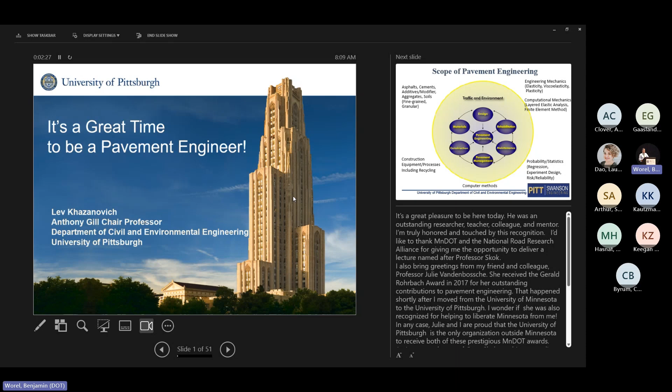In my pavement class, I like to start my course with a slide that I adapted from the great Carl Monismith. It shows that pavement engineers deal with a wide range of very complicated and important problems. And solving them requires a deep knowledge of material science, engineering mechanics, computational mechanics, mathematics, computer methods, mechanical engineering, and many other areas.

And that makes pavement engineering a truly interdisciplinary field. But many people, especially in academia, think that pavements are a low-tech field. And I can't blame them, because 35 years ago, I was one of them.

Again, I was trained as a structural engineer in the former Soviet Union. And when I applied for a PhD study at the University of Illinois, I wrote in my application that I would like to do research in concrete structures. But I was accepted into a concrete pavement engineering program.

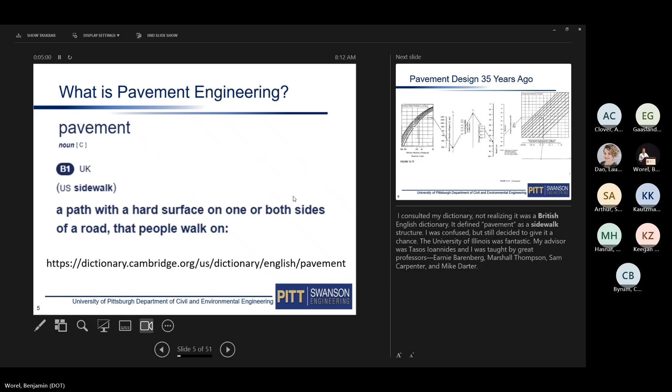Many of my classmates like Jeff Roesler, Tom Van Dam, Navneet Garg are industry leaders today. But the subject felt quite strange.

In the first year, I was taught that to design a pavement using the empirical AASHTO design method, what you really needed was a straight edge and a sharp pencil. In '93, this procedure was significantly improved by adding a straight line.

There was a Westergaard model, but it treated a concrete pavement as a plate on a Winkler foundation. So a simple structure, at least how I thought at that time. We were told that a critical loading on a pavement is a wheel edge loading that generates high tensile stresses at the bottom of the concrete slab. And there was a simple analytical solution for this.

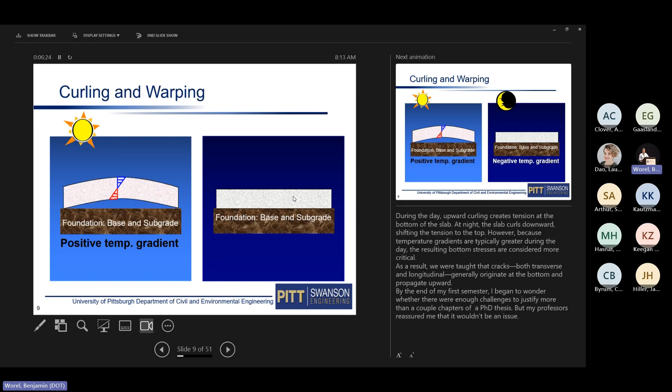But we were told that daytime gradients in temperature are higher than nighttime gradients in temperature, so tensile stresses at the bottom are still higher than the top. So cracking would only initiate from the bottom and propagate up.

When I was asked at the end of the first semester if I still would like to continue a PhD study in this field, I was wondering if there would be enough problems for the entire PhD thesis to analyze this simple structure. My professors assured me it wouldn't be a problem. And 35 years later, I can see that they were correct.

A bulk of my research dealt with development of finite element tools for analysis of concrete pavements. I was improving a computer program, ILLI-SLAB, developed by Professor Barenberg and his student Amir Tabatabai in the late 1970s. This program was later improved by many graduate students at the University of Illinois, and I made my modest contribution to it. By the end of the 1990s, it became quite powerful, although a very difficult tool to use.

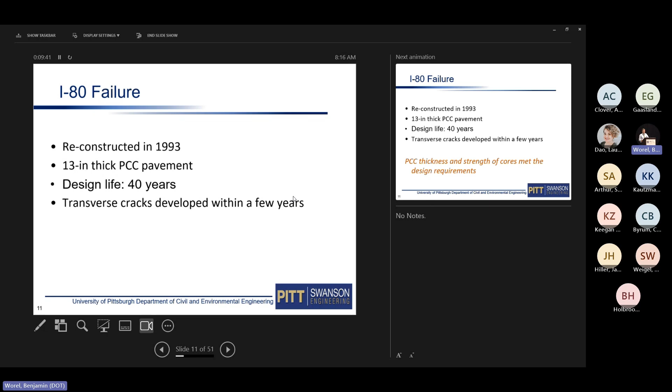Numerous studies demonstrated there was no thickness or strength deficiency in that pavement, but the number of cracks kept increasing. What was really strange was that cores clearly indicated that cracking initiates from the top and propagates to the bottom. That was strange because, according to Westergaard theory, it could not happen - transverse and longitudinal cracking were supposed to initiate from the bottom and propagate to the top.

We just finished developing iSlab when ARA was asked to investigate this problem. We collected all the information we could about this pavement - its thickness, strength, material properties, temperature gradients - and performed comprehensive iSlab 2000 modeling. We conducted hundreds and hundreds of simulations. Now we could do it, and now we could easily visualize the results. But in spite of some minor improvements, the results clearly confirmed the Westergaard theory - stresses at the bottom were always greater than stresses at the top.

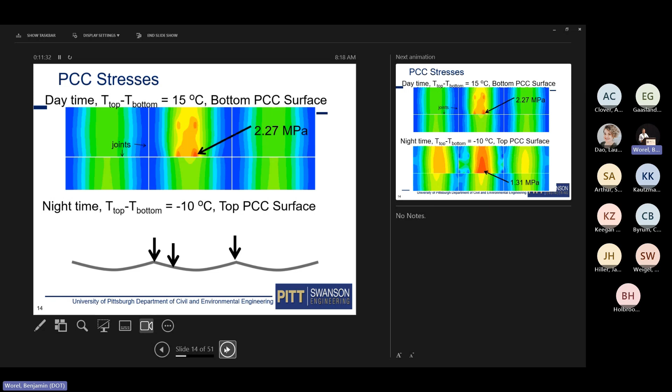So we improved our model. Instead of modeling just one axle, we modeled placement of an entire truck on the pavement for nighttime conditions. It didn't make a significant difference. It made the results a little bit closer, but still the bottom stresses were higher than the top stresses.

At that time, Dr. Darter came from Chile, where he took this photo, now iconic. You can see a shadow for this string, but the photo was taken during daytime - otherwise you wouldn't be able to see it. At daytime, the slab is supposed to curl up, but it behaved as if it were nighttime.

So we looked in the literature and found some research at the Technical University Munich, where this phenomenon was explained by two processes: an irreversible shrinkage and a temperature gradient during solidification of concrete immediately after placement.

So we performed a kind of quick assessment of this phenomenon and introduced built-in curl temperature gradients - a temperature gradient that is required to make the slab flat. When we accounted for this in the analysis, we were able to predict that stress at the top surface can be higher than the stress at the bottom surface, and cracks can propagate from top down.

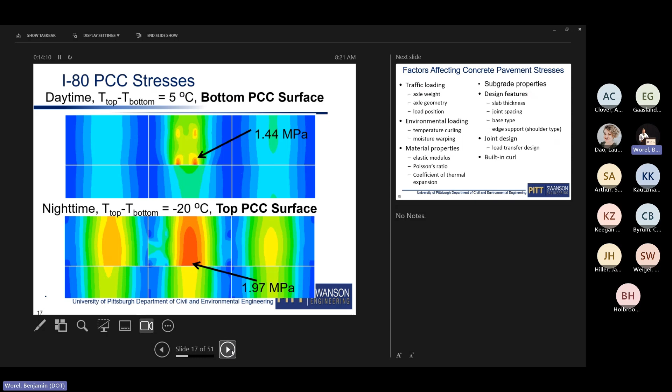But that made the problem of predicting critical stresses for the mechanistic empirical design even more complicated, because stresses in concrete pavements depend on many factors: traffic loading, axle geometry, axle weight, load position, how far it's placed from the edge, temperature gradients, now moisture gradient, material properties that change with time, subgrade properties that change seasonally, slab thickness, joint spacing, base type, presence of shoulder, and many other parameters.

So what we did was look into machine learning - how to develop a model that will predict the stresses almost instantaneously, but be accurate at the same time.

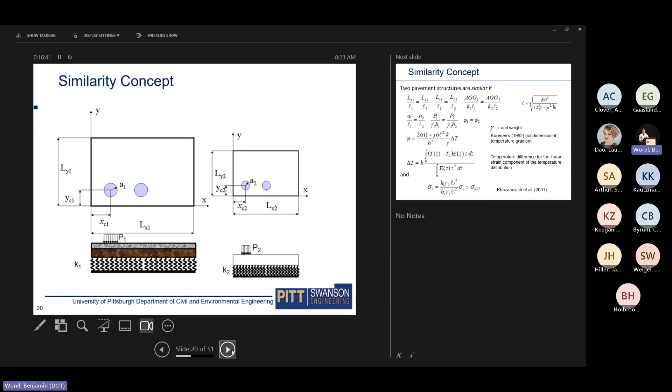We developed a mathematically rigorous condition for the similarity. I will not go over these equations. I just would like to point out one parameter, a non-dimensional temperature gradient that combines seven independent parameters into one factor. I found this parameter in a Russian book where it was given without any explanation as a self-evident quantity.

But we checked it, and it really works, and it allowed us to develop neural networks that matched iSlab 2000 very closely. And that allowed us to develop a very efficient procedure for design of concrete pavements.

Some of you may remember at that time it was called the 2002 Design Guide. It was introduced. A single asphalt design took like more than an hour, and concrete design took a little bit more than a minute, most of which was consumed by

climate simulation. So I'm very proud of the work we performed 25 years ago. That means it can be improved, and I'll show you some improvements today. But it was, in my opinion, a remarkable achievement at that time. Mike Darter, who led that effort, made an enormous contribution to the field.

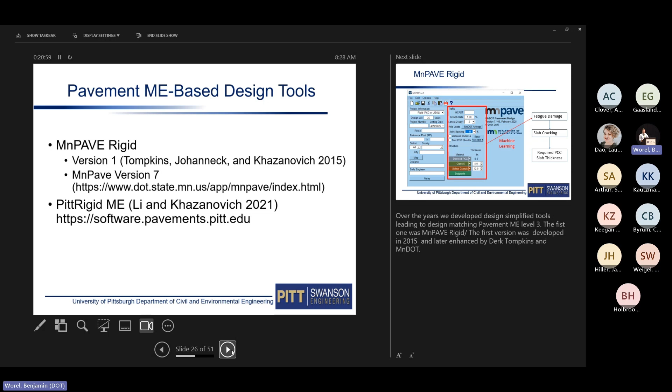And later, when we moved to Pittsburgh, we developed a similar tool for Pennsylvania conditions. So you can see MnPave. Basically, what we did was take these inputs identified by MnDOT.

We ran a very extensive simulation of AASHTO 1.1 software, collected fatigue damage, and using analytical extension, computed slab cracking, and from that we were able to determine the required slab thickness.

For PennDOT, we used the same approach, but now we used Pavement ME version 2, and we included a few more factors. The program not only computes the required slab thickness to combat cracking, but also determines the required dowel diameter to prevent excessive joint faulting. In addition, it also predicts the development of cracking and faulting over time explicitly.

These are simplifications of the design guide, but that doesn't mean the design guide doesn't have limitations, and one of them was identified a long time ago: the way the mechanistic-empirical guide models the interaction between the concrete slab and the base, especially if the base is stabilized. For an aggregate base, it's not an issue, but for a lean concrete base in particular, the loss of bond is the most important parameter that controls predicted cracking.

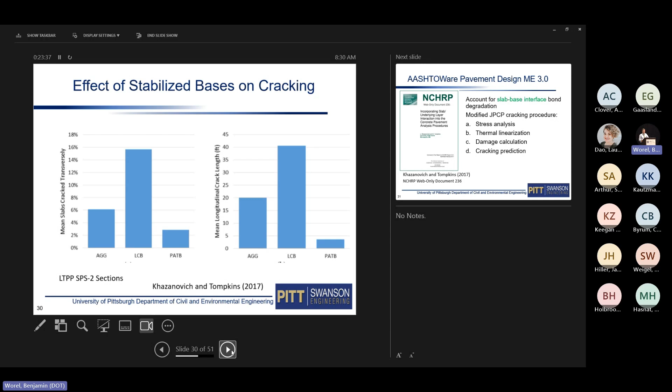So we were lucky to win NCHRP project 1-51, and Derek Tompkins and I developed a new tool. We looked at the interaction between the base and the concrete slab, and we introduced a partial bond and an ability to vary this bond over time and deterioration of this bond.

But it did not help to improve predictions significantly. So we looked at the entire procedure and we modified the stress analysis. We looked at the temperature linearization. We modified damage calculation, modified cracking prediction. So basically, it's easier to say what was not changed than what was changed. It's a really new procedure.

After the project was completed, I performed a detailed fracture mechanics simulation of the concrete slab, and we found that the new model is actually much closer to reality than the old one.

But I would like to point out another parameter that was changed: built-in curl. When we introduced it in the end of 1990s in the United States, the first reaction was no, that's not correct. But in two years, it was accepted as ground truth. And if you go back to understanding the causes of built-in curl...

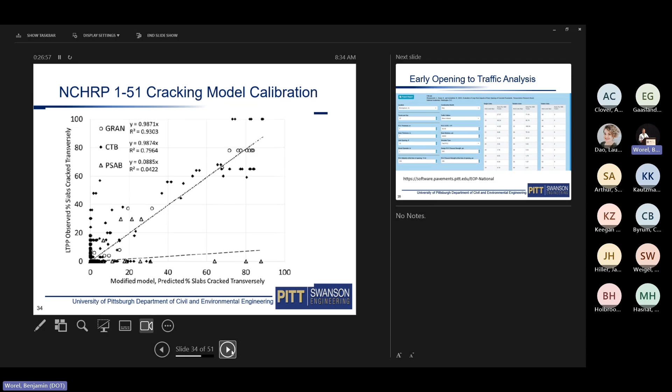But there were several other projects where we had to develop different machine learning techniques. We developed a tool for early opening of concrete pavements to traffic, based on a project sponsored by NRRA, and Bernard Izevbekhai was the project manager for that study.

And again, in that project, we simulate stresses in concrete and deflections in concrete pavements immediately after concrete placement and opening to traffic. This is different from Pavement ME, which assumes that concrete is at least a month old.

We developed a new procedure for unbonded overlay design as a result of a pooled fund study, where Tom Burnham was project manager and Julie Vandenbossche was co-principal investigator. And again, that requires different machine learning because the structure is quite different, so we use a different slab model to simulate.

So basically, over 25 years, we developed a variety of models, and we used machine learning quite extensively for solving very complicated engineering problems, making it transparent to the user. So basically, the user can concentrate on engineering problems and not on performing calculations.

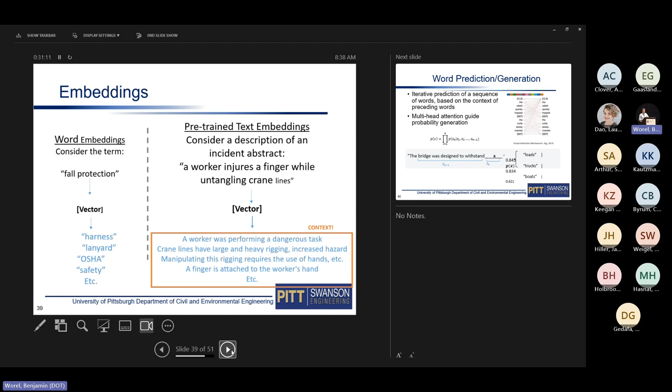So pre-trained models take words or sentences and convert them into vectors, and it preserves not only the meaning but the context of the word. For example, if you have 'fall protection,' if properly converted, the model understands that it's similar to safety, harness, and so on. Similar with sentences - if you're talking about an injured worker, it understands similar content to this.

Large language models are a totally different mechanism. They're based on probabilistic predictions of the next word using the mechanism of self-attention, and so basically they can predict the next word based on the previous words.

We've just started doing research in this area about 2 years ago, but in my opinion it's already got some exciting results. For example, we used it to identify major causes of construction accidents. The Department of Labor collects data on all accidents that resulted in hospitalization. We extracted accidents related to highway construction, vectorized them, and classified them. It allows us to develop a little bit better understanding of the major groups - a classification that better matches the narrative described in the database than classification performed manually, and it allows us to develop hierarchical exploration.

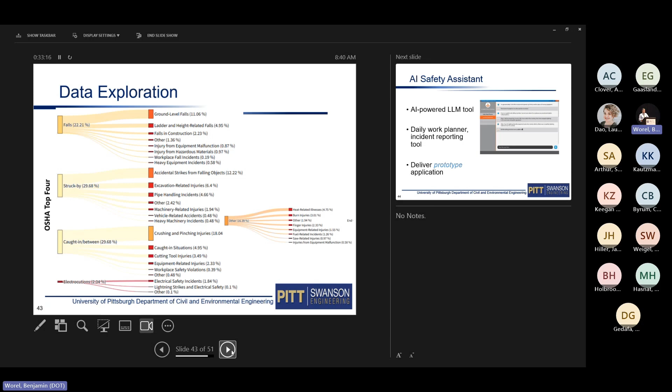It was our first application of this technology, and now we're working on an AI safety assistant - a tool that will help safety officers come up with daily instructions to construction crews based on specific operations the crew is supposed to perform. We're taking best practice manuals from MnDOT and the Department of Labor, and we also take into account past accidents from the Department of Labor database. We'll be able to provide specific recommendations, done in an interactive manner. The assistant is supposed to ask the safety officer exactly what operations are supposed to be performed, what materials and instruments they're going to use, and come up with the best recommendation.

In the unfortunate event of an accident, the tool is supposed to help the safety officer develop a report that is consistent with Department of Labor requirements, but by asking follow-up questions about what actually happened, to collect in a simple way all the information required for the accident report, and avoid the need to manually select the numerous categories currently required.

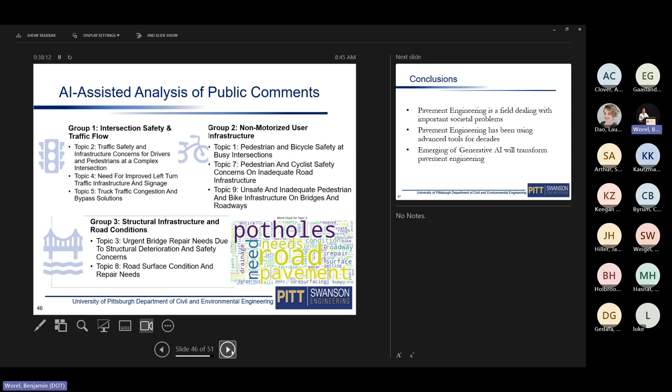But it's a huge task, and it's exciting, because if computers can play chess better than humans, they should be able to assist pavement engineers to do their work really well. It sounded like science fiction a couple of years ago, but it might be a reality pretty soon. It is an exciting time to be a pavement engineer.

It will change. AI will change our field pretty soon, but the entire world will be changed. So we should embrace it.

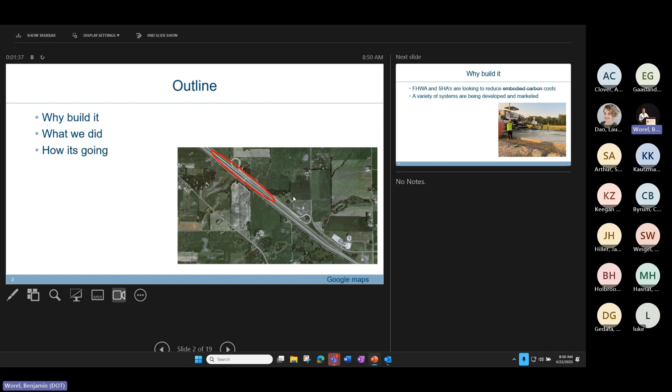Why build it? Well, federal highway, state agencies, and indeed the cement industry or the cementitious materials industry is working hard to reduce costs. Although the cement industry would still tell me, we don't care what the feds are doing, we're going to be at carbon neutral at 2050, so talk about it at will. So my presentation today is not funded by feds, I can talk about carbon.

But the impetus when we were doing this work was very much to reduce carbon impact from cementitious materials in our pavement construction. As Lev said, this is a real exciting time to be a pavement engineer, because not only are the design procedures changing and getting better, but the materials are changing. And some of you would say not getting better. But yeah, we have a whole swath of different materials available to us, which means we have to work hard at understanding them, how they perform, and how to work with them, which is a fairly large part of this conversation. There are a number of innovative people out there developing interesting and new combinations of current materials and new materials. As conservative engineers and control freaks, and most especially DOT-based, very conservative control freaks, we're very reluctant for change.

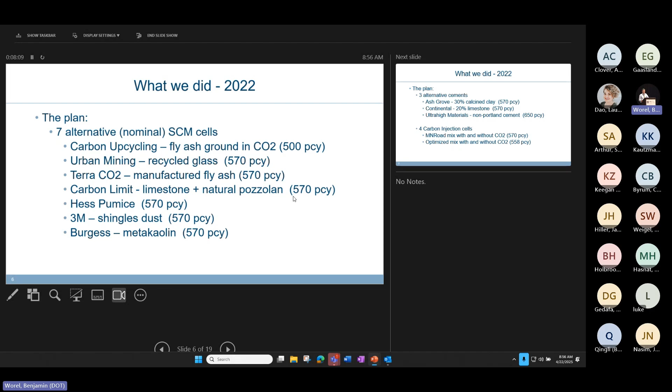There were 3 alternative cements: an Ash Grove calcined clay with 30% clay. There was a 20% limestone, and that was a request from us, because the thought was, if we're getting 15%—hey, we're engineers, 15% is good, 20% is better, right? And Continental agreed to provide us with that material. Then Ultra High was a non-Portland cement proprietary product. And then there were 4 other cells, which I was involved in, with carbon injection.

The theory being is that if you inject frozen CO2 into the ready mix truck at the time of batching, that CO2 would mineralize and help with the hardened properties of the mixture. The catch being, and their claim was that you could cut the cement content back because you were getting better performance out of the mixtures.

And so we had a standard Minnesota DOT mixture with and without carbon, and then the optimized mixture with and without carbon. The one thing that did happen in this case is that the suppliers were a little bit nervous. They were told, have at it, if it fails it doesn't matter too much, do your best. But they were kind of nervous, worried about the high visibility of this, and they didn't optimize as much as they possibly could.

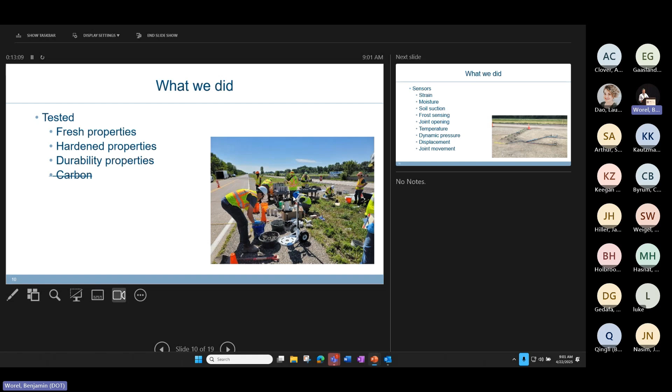We were trying to measure everything that we could possibly measure, and then every year going back and having a look at what are we seeing. How is it standing up? Is it spalling? Is it cracking? Is it raveling? Is there any other distress? We were up there a month ago, did a quick look at some of the sections, or all of the sections, to see how they're doing. And we will be reporting those in detail a little later.

So a couple of the key things that we learned - many of the suppliers delivered the product in super sacks, and what we discovered is that many of these products don't get out of super sacks too well.

Larry and a couple of the DOT staff spent a couple of late nights with vibrators and hammers trying to get the super sacks drained into a cement truck, which was then used to blow the material into the hoppers for the batch plant to be able to put it in place. I think there was a lot of interesting language late at night trying to get these materials out of the sacks.

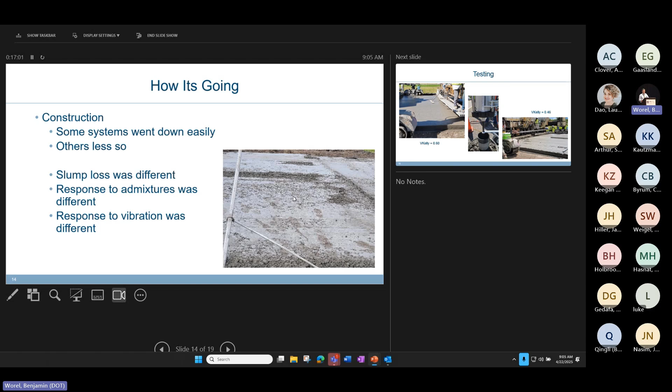I know Lev's group with Julie is working on this. I've got a research project going on it. Tyler Ley is working on it, and we're all happily competing with each other.

One of the tests we ran was the V-Kelly, which is built off an old California test, where you put a hemisphere on top of the concrete, a 6-inch hemisphere, run a vibrator, and measure how quickly that thing sinks. We found a really good correlation between what that device was telling us at the speed trap and what was coming out the back of the paver. It was even better than the good eyes, because a lot of us standing in front of the paver, watching the material come out of the truck, would just go, that looks good or not.

I was fooled at least twice, and in both occasions the V-Kelly test did pick it up. So I think this one does have some potential to be useful, particularly in the lab and potentially in the field going forward for feedback to the batch plant.

Another innovative test we were running out there was the Phoenix—this is Tyler Ley's test. It's basically a muffle furnace. You take half a cylinder, throw it into a tray, cook it at high temperature for 15 minutes, and measure the moisture loss, then back-calculate the water content of the mixture, which is critical because that defines the performance of the concrete in almost every respect. The data were internally consistent, so yeah, it's looking pretty promising.

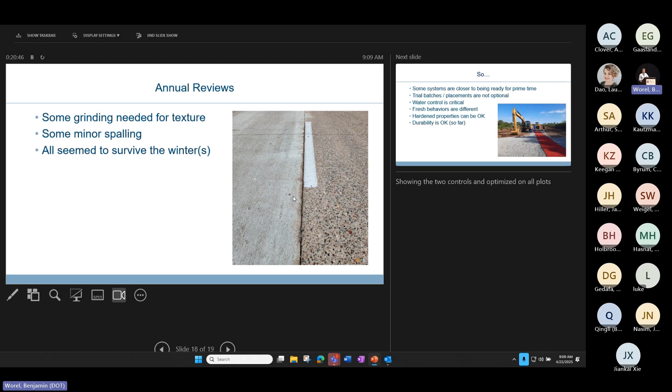All of them seem to have survived at least 3 winters so far. So in general, how's it going? Pretty good. To me, the hard part has been the delivery and the construction part. The survivability seems to be okay so far, though some systems are a little closer to being ready for prime time than others.

Trial batches and trial placements are critical. There was one difference between the '24 and the 2022 work: it was insisted that the day before, they had to make a truck and dump it on the ground, and put it out as a stripe. It wasn't coming through a paver, but having a look at how it's looking as it comes out the back of the truck so that we could get the batches correct for the ready mix plant, not just labcrete.

And I think that made a pretty big difference in making it more user-friendly. Water control is absolutely critical, more critical than it's ever been for traditional materials. Fresh behaviors are all over the place, so the rules of thumb for our finishing crews are no longer valid. We're working actively to figure out what tools we can provide to the finishing crews to help them do their jobs a little bit better. Hardened properties seem to be generally okay, and durability so far seems to be pretty good.

And if anybody wants to go, there's a trip to MnROAD tomorrow. I'm assuming there's going to be a red carpet, at least for Lev.

Okay, so I guess the key message from all of this: same old, ain't the same. Life is going to be different. It's an exciting time to be a paving engineer. And with that, I'm done.

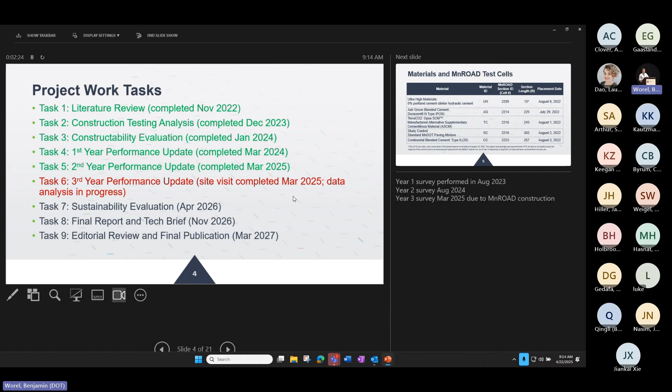So I'm here to talk to you today really briefly about these cells, which Dr. Taylor had reviewed briefly, and which I'm not going to talk about too much. You have the information, and he went over what these mixtures are. They all have different kinds of alternative cements in them.

There's the blended cement with calcined clays - that's the Ash Grove. The Terra CO2 is kind of like a manufactured fly ash. The control is a little bit different for MnDOT, or at least now it's the new standard, which has the Type IL in it. And then the Continental, the CC, is a slightly higher fraction of the PLC.

So here's just what I'm here to talk about really quickly, and Nick will be doing the same from Nichols for his sections. Really the only recurring distress that we saw had nothing to do with the paving mixtures.

This was due to a construction issue, now attributed to a roller finishing an asphalt shoulder, kind of riding up on the edge and creating this regular distress in the driving lane at regular intervals. Other than that, as Peter said, they look great - they look like highway pavements. We don't really see anything that could be tied back to the mix itself, the paving mixture.

Some things can be mostly tied to the joints, the transverse joints, and incompressible material getting into those transverse joints, and then the panels moving as they do. So we're seeing some minor spalling, and we're seeing deterioration of corners where the transverse and longitudinal joints meet. Otherwise, there's really no significant structural distress in these cells.

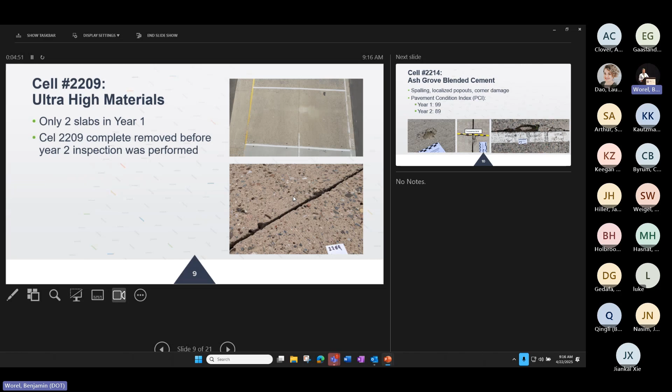We are also seeing, again, the majority of these cells were significantly diamond ground, meaning that the majority of this were taken - I don't know how much they ground - but there are areas that show that there may have been some surface cracking, likely shrinkage cracking, having to do with paving conditions and timing.

And so you'll see a lot of that in the shoulders, because a lot of them are unground, so you can still see that surface cracking in place. But what's encouraging is that a lot of that surface cracking isn't really deteriorating. So it's showing that this is superficial and isn't really going to significantly affect the life of the pavement.

But there are some areas where the diamond grinding wasn't deep enough to take off the shrinkage cracking, and we can see some deterioration of that shrinkage cracking. As Peter said, these are highway pavements - these are not airfields, so we're not worried about FOD generation.

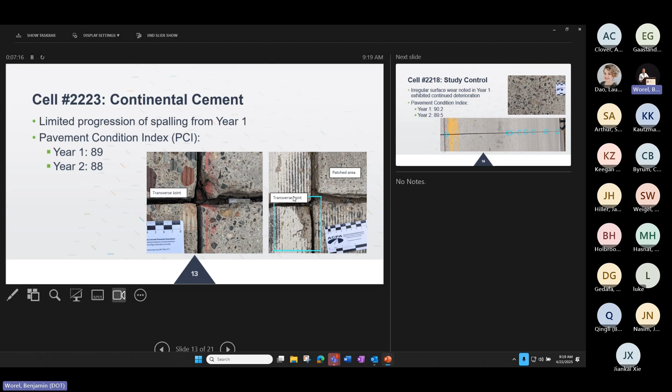Again, very similar. There was a patch in this cell that was performed when a panel was replaced, and you can see that we still see some deterioration around that, having to do with incompressible materials getting in and panel movement.

Here's the control. Control is demonstrating a lot of the behaviors we see everywhere else, so it's serving its purpose well. No fatigue or damage that can be tied directly to the paving mixtures. Instead, the control is a really good control in this study because it's demonstrating that the presence of surface debris matters, and that as these incompressible materials get into joints, you can have damage associated with that.

The control section is near a turn-in to the main line. I don't know if you know the MnROAD sections well, but there's a turn area, and the control is the section that's right on top of that. So it sees a lot of surface debris, and as a result, we've highlighted areas where we see minor spalls that develop from the presence of incompressibles and joint or panel movement.

So that's it, this is the monitoring and summary. Overall, we see that the pavements were performing well. They're performing as expected, and nothing that we see in the condition or the distress can be directly attributed to anything to do with the paving mixture itself and the use of alternative products.

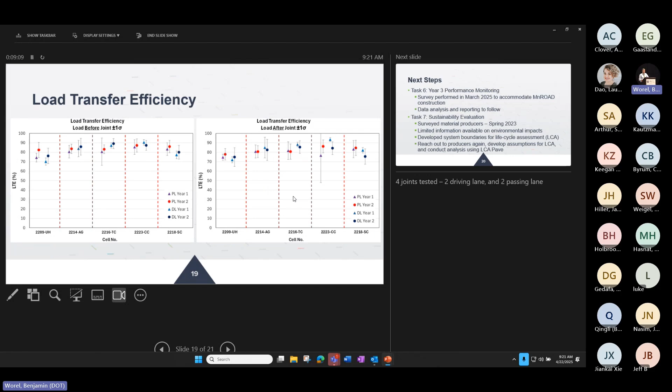And then finally, the year 3 survey was performed in March. There'll be analysis and reporting to follow. And then there's an evaluation of the sustainability practices. This is where Prashant really knows his stuff, and he's also been complaining about no EPDs, and he's waiting on EPDs. So that'll be something that's important for future work.

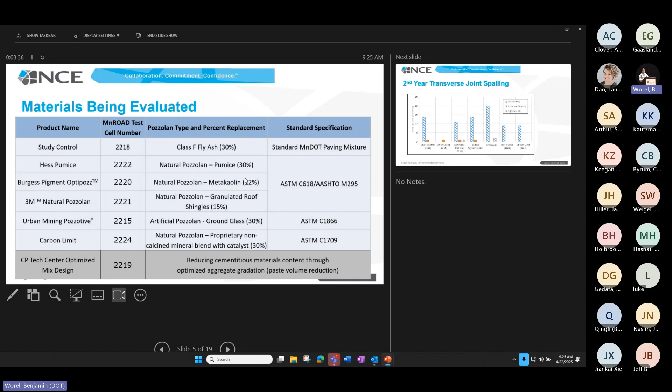And then lastly, the optimized gradation, which is all the same materials as our control mix, just a slightly different aggregate blend. We have a couple of different graphs here.

Trying to group together the area distresses, scaling, map cracking. Only a couple of the sections really had any noteworthy distresses out there. Generally they're performing pretty well, but let's get into each of the sections.

With the Urban Mining Pozzotive material, this one looks pretty good. I know it's hard to see with some of the pictures in the back, but generally it looks pretty good. You have a little bit of finishing issues on top in certain spots, areas where the workability wasn't great. Finishers had to add a little bit of concrete to get everything nice and smooth, but overall this one's doing pretty well.

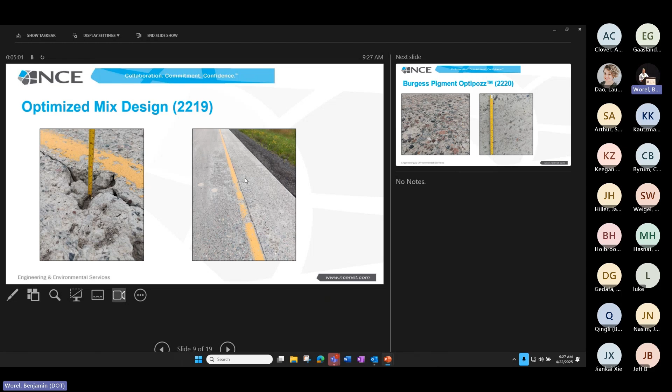We get into the optimized gradation. There was one area where it was a little bit dry. You can see it had a hard time trying to consolidate over the winters. This has started to blow up a little bit. But by and large, this spot in particular has not continued to deteriorate, which shows that this was just kind of an isolated incident, most likely during construction.

With Optipozz, it's always hard to try to show this in pictures, but on the left you can almost imagine someone came in with their hand and dragged it into the surface. There's a few of these streaks that have given up material. But again, these also have not deteriorated, which makes me think this was just a dry area. It flaked up after the first couple winters, and once we got back down into the solid material, things are performing pretty well. On the right, we do have a lot of scaling in this section as well, as you saw in the graph.

When we get to the 3M section, this one actually looks pretty good. You wouldn't think that this was 15% granulated roof shingles. We had a nice smooth texture, doing pretty good.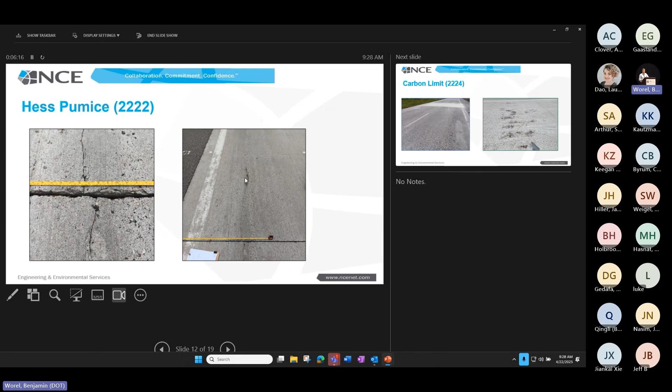Hess pumice is the only section that we had that actually had any sort of cracking in it. Here we have a longitudinal crack that goes through 2.5 slabs. From what I remember a month ago, this crack has grown a little bit in length, but severity-wise is still holding together.

And Carbon Limit, again being the one that was our 3-part mix that was delivered unblended, so I'm sure there is some impact of that with these areas. It was a relatively dry mixture. You can see that in the image here to the right, and again a little bit on the right side of the image on the left. Very dry mix, very hard for the finishers to try to get this consolidated and smooth. A lot of water was added.

After the first winter, you can see MnDOT added some bituminous patch material to these areas, tried to get it to close up, but they deteriorated a little bit more. Eventually these 2 slabs on the right became these 2 slabs up here that were replaced. The replacements are doing very well, by the way.

That was the ugly, but overall, I know these pictures are small, the sections do look good. Things look pretty good out there, considering that we've been through 3 winters now. So where do things stand?

A lot of these materials have never been through a batch plant, they've never been through a paver. A lot of these material suppliers have no idea the needs of the concrete industry, what we're looking for in terms of workability, material properties. There's a lot of learning that needs to be performed with these.

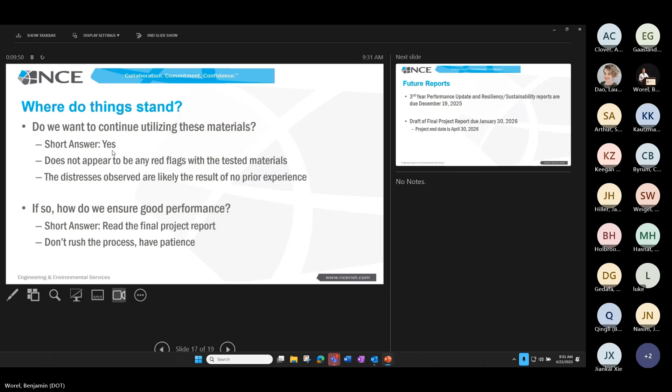In fact, I saw a plastic pavement go down in California a couple years ago. It went down on a Friday, and that night there was all these news articles about how great it was. Come Monday, Caltrans decided to mill that sucker out. We can't be too quick to judge these materials either way. The proof is in the pudding, and after 3 years, it looks like pretty good pudding, but we need to be a little more careful.

The third year site visit was conducted a month ago. That report's going to be coming out, I think, at the end of this year. Our final report will be due in about a year and 8 days, not that I'm counting days, and shortly thereafter it will be publicly available. I know some of our other reports are already up on the MnDOT website, but here's my email if you have any other questions. Thank you.

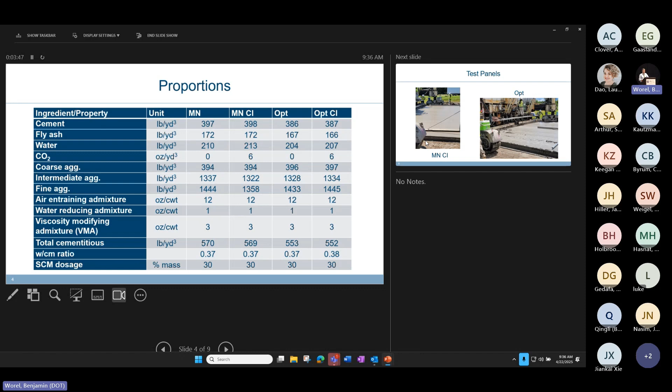Let's move on. Like all the other panels, we were watching how they went down. The Minnesota mix with the carbon injection went down beautifully - the crew loved that one. On the right is the optimized mix without the carbon injection - that was a little crunchy, had to have a little work to get it finished. That was probably the worst of the 4, and this was the best of the 4. The other 2 were somewhere in between, mostly just fine. So again, I don't think we're seeing an effect of the carbon injection on the workability of the mixture.

After 2 years, we did do distress mapping and droning. The other speakers have already talked about this, and all of the panels exhibited a little bit of spalling. Load transfer - there was more noise coming from whether it was on the traffic lane, the heavy lane, or the high-speed lane. Very little signal coming from the differences between the different mixtures. All of them seem to be doing all right in terms of ride quality, and again, all the signals we're seeing are not related to the differences in the mixtures. Again, no clear signal from faulting.

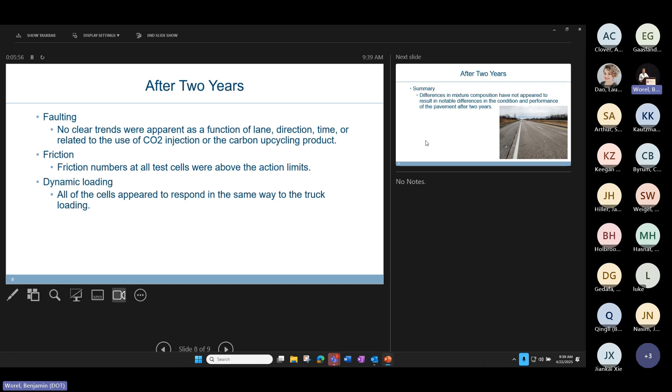Friction - we're well above action limits, so they're doing fine. Dynamic loading - all seem to respond in much the same way to vehicles going over them. So again, the signal coming out of this is: yeah, it's fine, carry on.

That's after 2 years. As the other speakers have said, we were up there a month ago and did a whole bunch more work. I got this file yesterday from the student, and I didn't look at it before coming this morning, I apologize. So again, the last signal, the information from this in summary is: the carbon injection doesn't seem to have hurt. It doesn't seem to have benefited a whole hell of a lot, but at least it hasn't harmed us. Carry on if you wish to. And with that, I'll hand it back to Tom. So thank you.

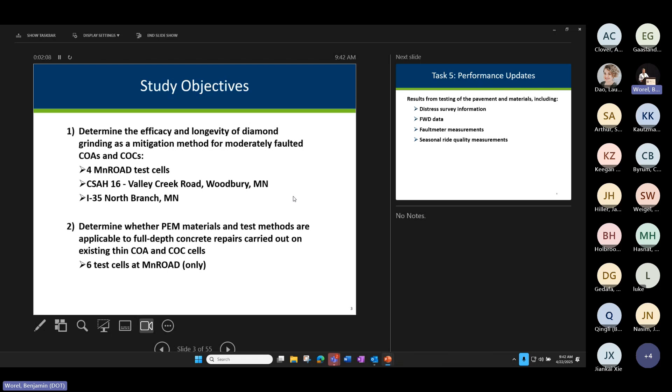Right now we're at task 5, which is mostly for the MnROAD cells, the 2nd year performance report. We've been collecting a lot of data - distress surveys, FWD, faultmeter, which is the big one we're looking at, and also ride quality measurements.

For Valley Creek Road, it's 5 inches thick over a 4-inch asphalt, and that asphalt is 42 years old, so kind of asking a lot out of it. They put 6 by 6 foot panels over it in 2012, and it didn't really last as long as they were hoping for. In 2021 they were looking to see what they could do. The faulting at that time averaged 2.2 millimeters - once you get over 2, you're really going to feel it - with values all the way up to 4.5. So really starting to get a rough ride, and they wanted to figure out what they could do to extend the life of that road.

Overall, this is a picture after 2 years - you can see the panels themselves were actually in pretty good condition. This is after 3 years of diamond grinding. This shows that 13% of the panels were cracked, but they weren't too severe, just showing some progression over the years.

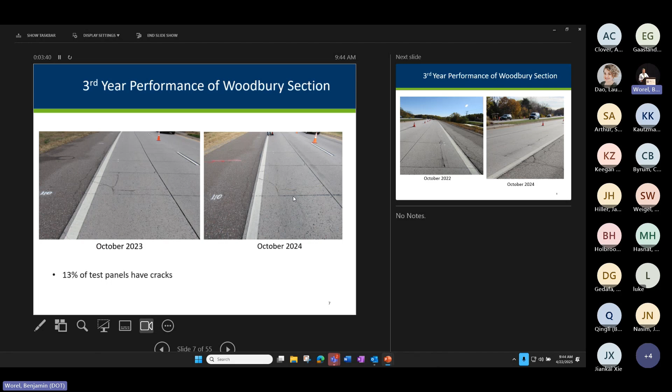Here's some more photos - I think this was the most severe crack we noticed, but overall just in good condition besides the faulting. Now looking at that faulting, this is a lot of data all on one slide.

So overall, the summary of this section: the panels themselves were in good condition and weren't deteriorating too quickly, but the faulting values after 3 years were approaching pre-grind values, and the ride quality we saw was approaching, but not quite to, pre-grind levels.

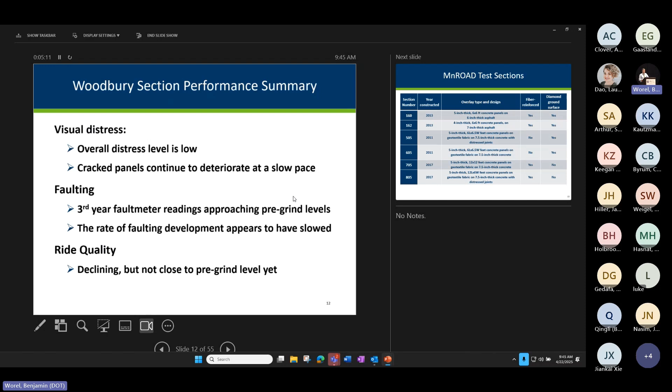We were also looking at 6 MnROAD test sections, a combination of 4-inch thick and 5-inch thick concrete overlays, with fibers, bonded and unbonded. So we had a whole variety of different sections we were looking at, and we diamond ground 4 of those sections, while 2 we left alone.

They were also exhibiting quite a bit of faulting, so it was a good opportunity to see if diamond grinding would help buy us a little more time. A lot of the panels were cracked and required repairs, so we were testing a different type of repair using tie bars and a PEM mix, the same optimized mix that Peter talked about in his study, to see if we could extend those and get it to work.

So to compare, we did see some issues with those repairs, but we wanted to confirm it wasn't a mix issue. This shows the strength results between the control and the optimized mix, showing that the mix itself wasn't the problem.

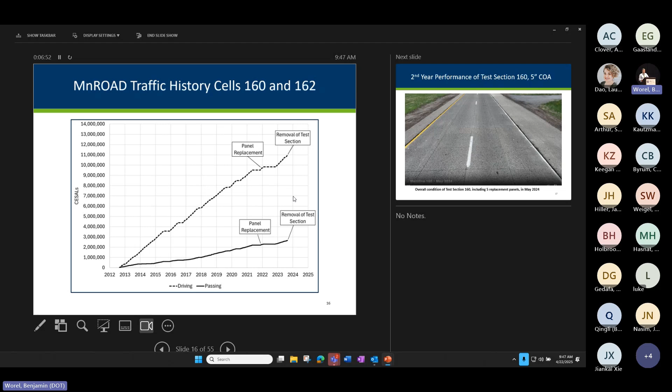A big emphasis here is that these MnROAD test sections experience a lot of traffic, much more than a typical 4 or 5-inch concrete overlay would ever experience, so a lot of accelerated distress happens from this.

Starting with section 160, it really wasn't in horrible condition, just about moderate distresses. We did replace a handful of panels there, and this shows what it looked like after 2 years. Not too bad, and here are a couple more pictures of the severe cracks we saw.

But the big question is faulting. This shows the progression of faulting from 2013 when the panel was originally installed. The pre-grind average was approaching 4 millimeters, and post-grind we got it pretty smooth, but after 2 years it came back pretty quickly.

With ride quality, pre-grind values in the driving lane right wheel path were 133. We got it pretty smooth after grinding, but after years 1 and 2 it came back very quickly.

Overall, the distress levels weren't too terrible for this section. The number of panels increased, but the big question is the faulting, and overall faulting came back to pre-grind values after 2 years. I'll note all these MnROAD test sections were removed and replaced in 2024, so they no longer exist.

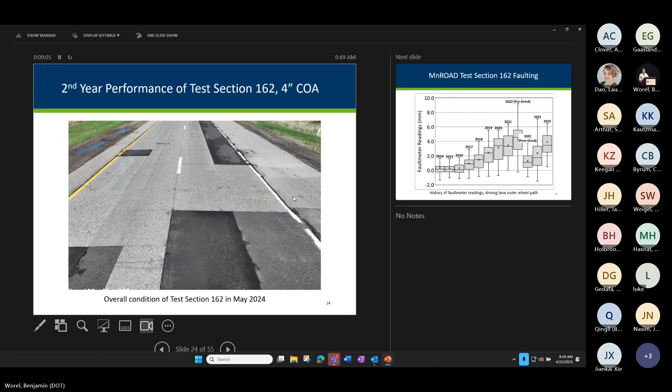Here's the faulting for section 162, similar to 160 but actually a little worse, and it came back very quickly. After 2 years we ended up tearing the section out and replacing it. Same thing with ride quality, and actually the entire driving lane was removed and replaced, so you can only see data after about a year, but it deteriorated really quickly.

Overall, distresses for this one were high, with a lot of cracked panels, and faulting returned fairly quickly to pre-grind values.

Section 505 was 5 inches of concrete over concrete, and we saw a lot of cracked panels. This highlights some of those replacement panels, which also cracked pretty severely and pretty quickly.

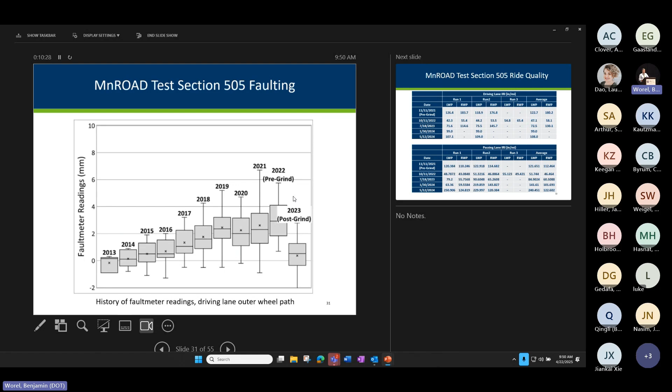So we ended up replacing a lot with asphalt after a couple years, here are some more pictures of that. For faulting, similarly, the entire driving lane was replaced, so you can't really see the progression after the first year, but it came back pretty quickly. Same thing for ride quality.

So after 2 years, we deemed the distress levels for this section very high. The entire driving lane was replaced, and faulting developed very quickly in both the driving and passing lanes.

Section 605 was again a 5-inch thick concrete over concrete, very similar, with a lot of the repair panels ending up cracking and getting repaired with asphalt. This highlights again what that looked like.

But the faulting wasn't too bad on this one, even pre-grind and after we ground it, though it did start to come back. So a little more promising, but not what we were hoping for, and ride quality also wasn't great after 2 years.

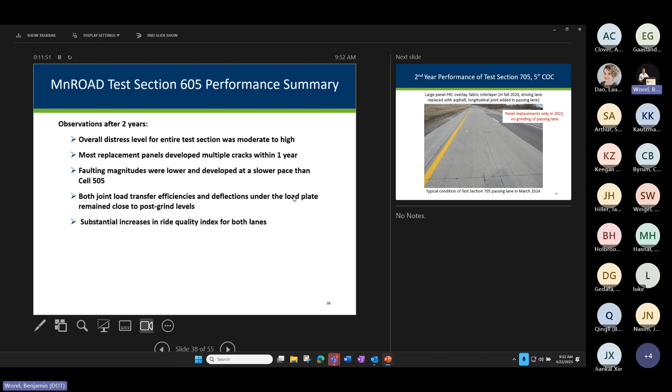So again, similar to the other sections, the distress levels for the entire section were moderate to high. Most of the cracked panels developed within a year, but the faulting itself developed a little bit slower than the other sections.

And then we had sections 705 and 805, and these two we didn't diamond grind. This is just a picture. One of the things we were focusing on here was replacing some of the panels in the passing lane, so these sections were passing lane only after the driving lane was entirely replaced. This just shows the typical condition of what that looked like. And then shortly after, those panels also cracked.

So again, wondering what caused that, or was it the mix? We don't think so. Was it the design of the repair? But then also we were tracking faulting in those repair panels, and we saw that faulting came back quite considerably.

So although the distress in the passing lane was deemed low, the panels themselves did crack and deteriorate pretty quickly, and to a severe level. So the joints developed moderate faulting even with that tie bar configuration.

So then again in 805, this was similar 5-inch thick concrete over concrete. This just shows some of those distressed joints that were replaced in the passing lane, and again, they developed cracking as well.

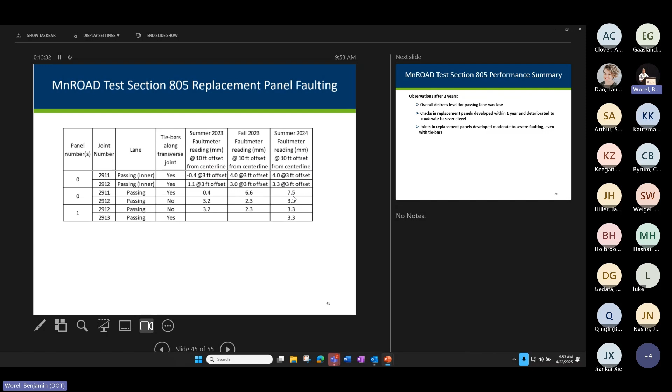And faulting quite severely, as you can see here. I'm just kind of highlighting some of the extreme values. So with 805, we saw the distress for the overall lane was low, but the panels that were replaced deteriorated and cracked to quite a severe level. And those joints that were replaced developed faulting, even with those tie bars.

Similar to 705. So overall from the MnROAD sections, what did we learn? We saw that the traffic itself is very high, so we have to keep in mind that all of these sections are experiencing accelerated levels of loading, and we're going to expect accelerated distresses here, but the results indicated that faulting will return quicker than we were hoping for.

And we also wanted to ask, did the use of tie bars around the perimeter help, or did that lead to critical stresses in those repair panels? And what we saw is they deteriorated pretty quickly. So again, all these sections were removed after 2 years.

And then now the final section that we looked at was I-35 near North Branch. So this one was ground in 2023, so we only have 1 year of data from it. And this one also used a similar configuration of tie bars in some of the repair panels.

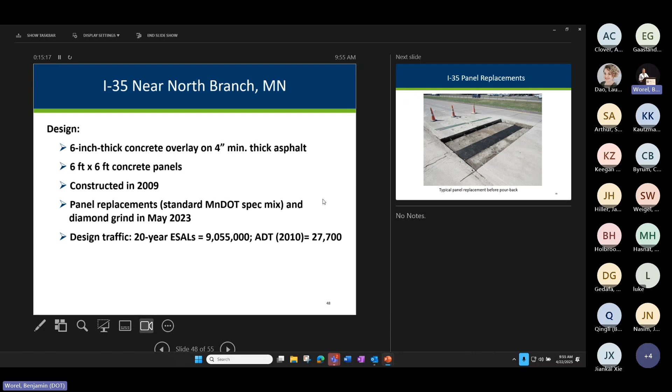But when we were out there testing this one, we set up a test section that did not include any of these repair panels. So this one was constructed in 2009, and again, similarly was designed to last about 20 years, but after about 10 years had considerable faulting. And this just shows one of those sections where the tie bars were put in.

Also, we put in fabric to try and prevent cracks from propagating through. And this is what it looks like in 2024. So overall, most of the panels themselves were in pretty good condition.

But the faulting's sort of coming back. So this shows our pre-grind and post-grind values for both the northbound and the southbound sections. After pre-grind, we were able to get it fairly smooth, and then after 1 year, they were starting to tick up, but not too considerably.

So we're actually planning to go out and collect fault meter on this section and FWD in about a month. So that'll kind of be our final section or study to see if diamond grinding works or not.

So then the ride quality here, still after 1 year was very smooth, so that was good. Again, just overall, the distresses in this section were very low. Faulting, although it started to come back, it really wasn't anything to be concerned of yet, but we'll see. We're going to continue monitoring this one.

So, like I said, the MnROAD sections are gone. We're no longer collecting any data for those, but we've got Valley Creek Road. We're hoping to get another 2 years of data from that. And then I-35, we're hoping to continue for 3-4 more years. We'll see. Again, just in general, not super happy with what happened for diamond grinding.

I'm going to talk a little bit about some work we have been doing in Michigan. Before we do that, I just want to briefly introduce some of the general background I have.

First, we are going to briefly go over the rubber modified asphalt project in Michigan, and then the chip seal operations we have done. Then we are going to briefly talk about some ongoing work, a project with NRRA. That's a funded project, it's still ongoing. So basically there are three blocks of information here.

The first one, I want to really share some of the rubber modified asphalt project in Michigan. As you can see in this graph, there are some projects in Michigan, a couple in the really north side of the state - that's where Michigan Tech is from. It's pretty far away, but Minnesota is really a nice place to come. The Minneapolis area is a great area, really close to this big city we can travel to. It's very, very nice.

And then the rest of the dots basically mean the projects we have been doing with rubber asphalt materials in state. We do rubber asphalt chip seal, and of course we also do some regular chip seal work.

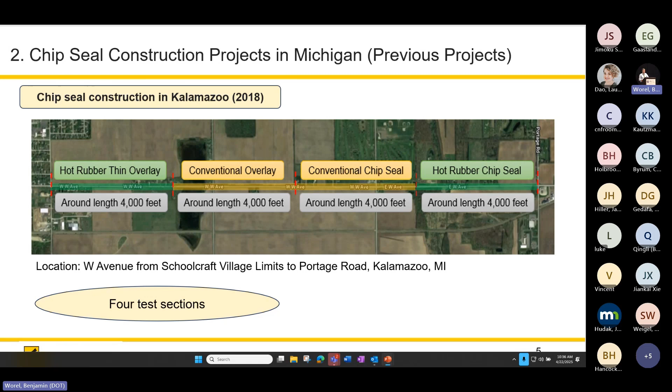At that time, we started doing some chip seal work. Some was conventional chip seal with emulsions, and some was hot rubber asphalt, which is not emulsion, so no water at all. Briefly going over that, we learned a lot of good lessons and got some good experience, and later on we started doing a little bit more work.

For example, the first time in 2018, what we did was just blend the rubber. You see the big truck here, and through the conveyor we transported the rubber powder to a distributor truck, which has the heating element and agitation units inside. After the viscosity reached a certain temperature, a certain number, we sprayed that in the field. On the right-hand side, this picture shows the rubber powder going into the system. But that was our very first attempt.

Over here you can see in 2021 we improved the process, and we actually started to spray rubber asphalt on the road. As you can see on the left-hand side of this picture, the road has a lot of cracks. It pretty much really needs to be reconstructed. But due to budget limitations, we decided to do chip seal with hot rubber asphalt.

That is the operation. On the right-hand side, you see here just the spreading of the chips. Everything else is the same as regular chip seal operations. The real difference is spraying emulsion versus hot rubber asphalt. That's really the difference, and that was 2021.

In 2022, we started using this rubber asphalt chip seal as a SAM layer, which is a stress absorbing membrane interlayer. We had a few projects, one of the noticeable ones in Bay County, Michigan. We used this really thin layer of rubber asphalt chip seal as this interlayer SAM layer, and then on top we constructed the regular asphalt mixture or rubber modified asphalt mixture.

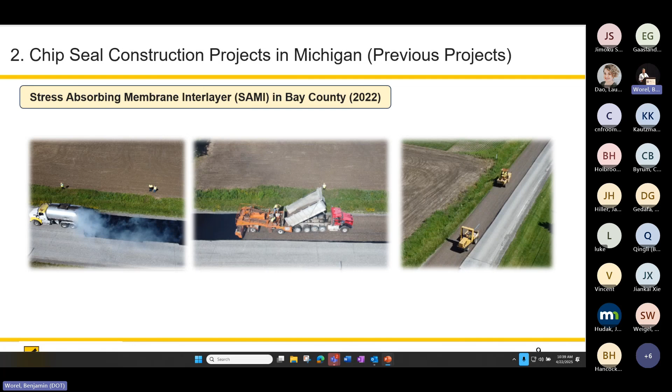Then of course at the end we placed a layer of asphalt mixture on top, so that's how we put the SAM layer in place. After construction, things are looking really good. We have a lot of signs - if you ever drive to that area you can see those signs showing who funded the project, that it's a SAMI control section, rubber section, and other different signs. This is on 7 Mile Road in Bay County.

Going through today, this is a project we got funded through NRRA. I really appreciate the support from NRRA, and I also appreciate the support from MnDOT for allowing us to use I-35 for this test route. We got a really good team here - along with NRRA and MnDOT we had Tyler and Rob Green, and a group of really good folks helping work with us. We also had Bay County Road Commission, who provided a lot of support to the team.

So what's the background of this project? We know that Michigan Tech, in 2017, worked on a project funded by NRRA and MnDOT on the seal coating performance project. Later on, we constructed a lot of rubber asphalt materials as chip seal in Michigan, quite some miles.

And then in the last few years, we also started to use rubber asphalt chip seal instead of emulsions like CRS2P or CRS2M. So far in Michigan, there are over 300 lane miles of pavement installed as part of a research project using rubber asphalt chip seal.

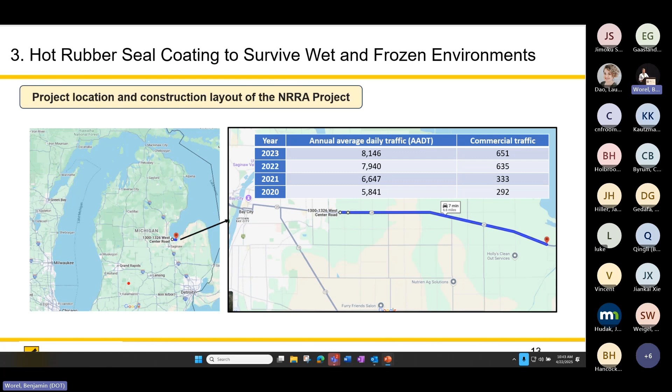This stretch is about 6 or 7 miles long. In this project, which covers 6.6 miles of 2-lane road, we have about 4 miles with less distress and about 2.6 miles with more distress. We also gathered IRI data and PASER rating data.

With that data, we constructed this in 2 directions using rubber asphalt material as a chip seal - just chip seal, that's what we did here. One section is rubber asphalt chip seal, other sections have regular emulsion materials, and in some cases we added fog seal just to create differences so we could really compare and make sure they are all comparable. A lot of places in Michigan love to use fog seal, but that's not absolutely required for this project.

Here I want to show you a few pieces of equipment. This is a hot rubber asphalt storage truck - for this project we have a central location to produce the rubber asphalt, unlike the first year in 2018 when we attempted using just one truck to blend everything, which was a little tough to do. This time, because the volume of material is larger and we have a few other projects nearby, we have a central location to prepare all the rubber asphalt.

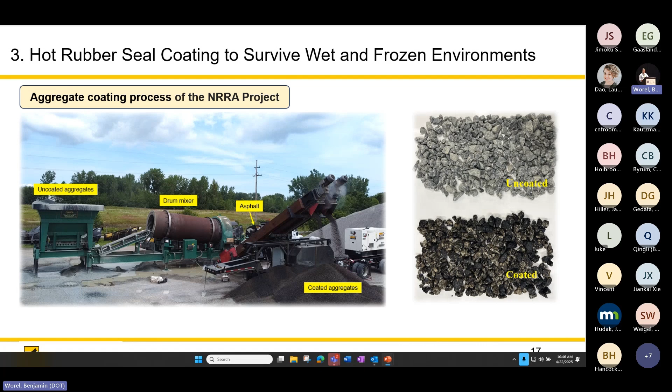When you look closely, you see all the small cracks also get sealed through this process. After that, we spread the aggregate chips, depending on the aggregate chip size. For this particular product, we're using roughly about 30 pounds per square yard.

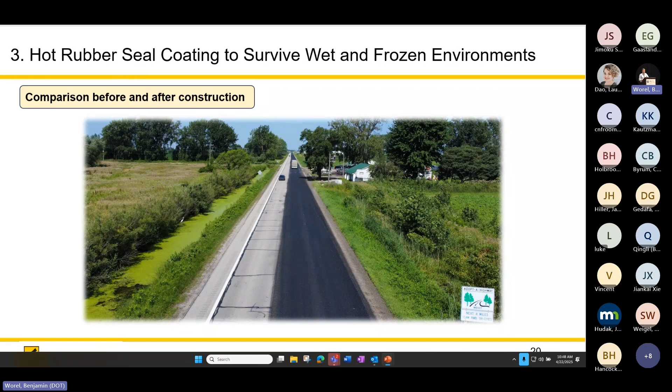Then it's regular operation now: compaction, sweeping, that's regular chip seal operation. Afterward, after you apply the fog seal, on the right-hand side you see the project finished. Only one lane is finished, and the left lane will be finished going the other direction. So that is, in general, what the product looks like.

This is after both lanes are ready. I have a small video here to show what that looks like. There should be music, but we don't have that here. The music was very nice, but the room is big, so we can just ignore that.

Now you see this is M25, about a 6.6 mile stretch. For the construction, we have layouts showing which places have more chip seal with emulsions, or which ones have more hot rubber asphalt.

This is all the equipment we're using. The reason we put all the equipment together is we also want to really understand what the environmental product declaration, EPD, looks like in the entire process. That's just a byproduct we are doing.

So this is pre-coating the aggregates. You can see we only need to partially coat the aggregates, we don't need too much asphalt. My first experience was using 1%, which was too much, we had to crush the crust off. The rubber content is about 25% by weight of the asphalt liquid.

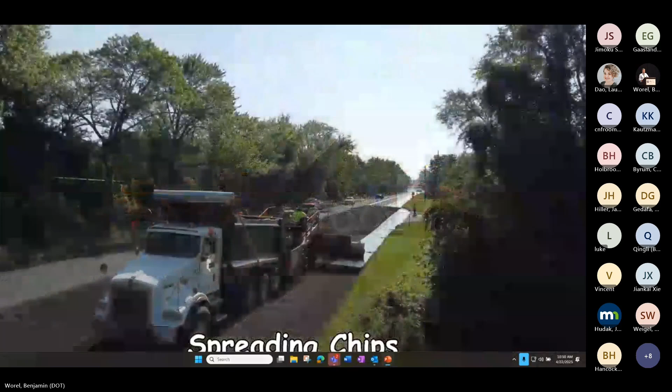Now this fellow is going to start spraying the rubber asphalt. A lot of vapor comes out because the road is cold, it's not smoke. Then we spread chips, about 30 pounds per square yard. Now you see the process, same as a conventional chip seal or seal coat. After that's ready, we're going to run the roller.

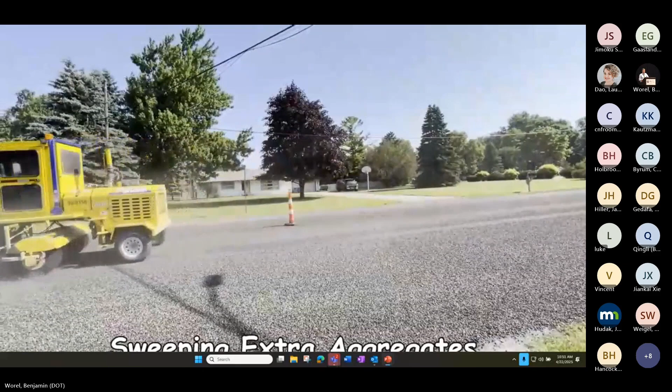So the compaction is ready, then the sweeping, just to make sure we get rid of the excessive amount of aggregates. Usually there's not much. This is the same as regular seal coating operations.

Like I said, we received a lot of support from different organizations.

After you apply the fog seal, it looks pretty dark, but in my opinion that's not absolutely required. I just want to show what the difference looks like.

Cost-wise, this is way lower than a regular overlay or something, but of course it's more expensive than emulsion-based chip seal. For this project, we used about 6,500 equivalent tires. We appreciate the support from NRRA, MnDOT, and Bay County road commissions.

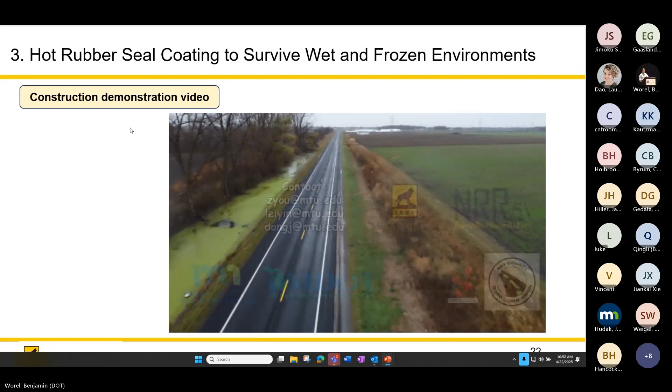That is what the picture of the video looks like, a silent video. Let's go to the next one.

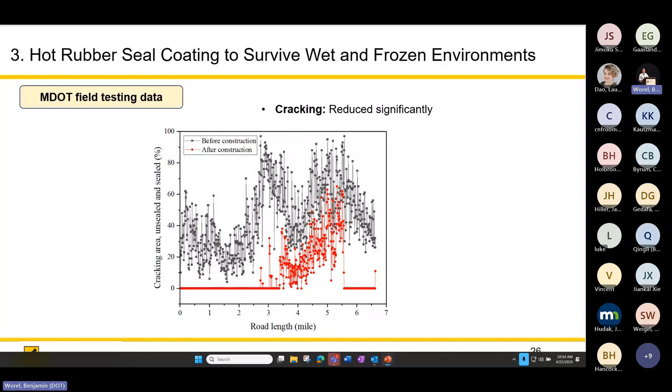Of course, after the chip seal, all the cracks are gone. You can see the cracking has really improved a lot, but again, we don't want to say too much about it - it's only year one.

We also did a lot of work in the lab. We prepared different lab work, like measuring different content of rubber materials we use. For construction, we eventually used 25% at different temperatures. We tested viscosity, dynamic shear modulus, phase angle, and creep compliance - those are documented. We also tested on the chip seal side, checking sweep mass loss, surface friction testing, and tensile bond strength or shear bond strength, and all those types of things. I just want to show you a few examples of this testing.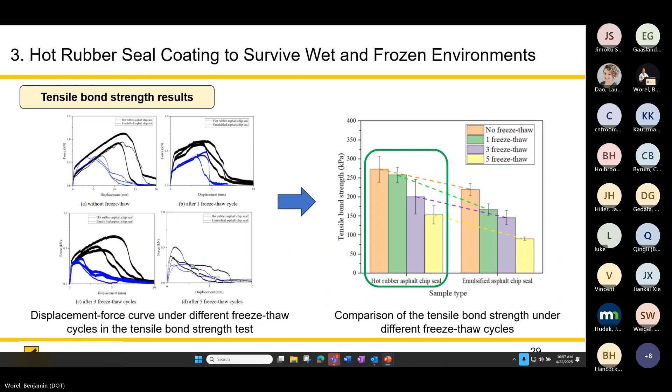This is some of the testing we are planning, and some currently still ongoing. I want to show you a few slides of what it really looks like. In summary, here is the direct tensile strength, which we call tensile strength, and the other is shear strength. Both get improved with the hot rubber materials. That's the biggest part we see.

Ongoing, we continue doing our lab work, and we also want to do more monitoring on the field. I really appreciate the support from NRRA and MnDOT for the testing coordination, and there's a lot of finance promised from MnDOT side. So with that, appreciate all the support. Thank you so much.

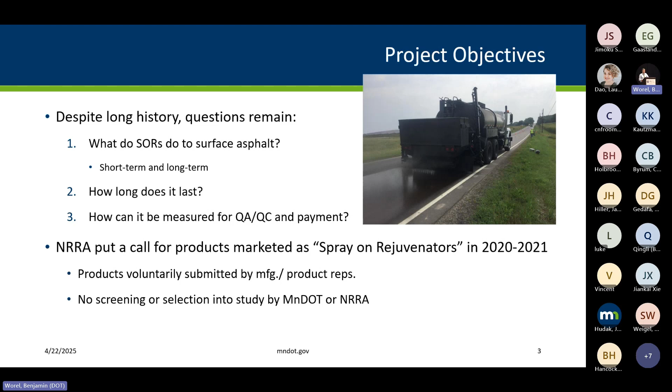We did not do any testing or evaluation of what a rejuvenator is or what they're actually doing to the pavements at this stage in the study. It's just general, if you want to participate. That being said, some of the treatments we applied wouldn't be applied on this type of roadway surface. They were just added for beneficial information.

Products in the study are divided into general categories: bio-based and petroleum-based, so where is the source material coming from. Then there's group A and group B, being with a fine aggregate application or with no fine aggregate application.

Very different aesthetic appearances with each of these. I call this image the checkerboard. It's kind of hard to see, but there's basically a white type fine aggregate that's placed on there, to a very deep black surface.

So a wide array of surface, just visual properties. The test sections themselves, we had 12 different products included in the study, and they were applied at 3 locations. Two of those locations, which are on MnROAD's low volume road, were applied in 50-foot stretches. So we will see those on the tour tomorrow.

You can see in the image here, we measured during application the spray rate, so the applied application rate. We also had roofing felt at the edges of the test sections, trying to avoid contamination or spray going from one section to the next, especially at MnROAD where we had everything more or less right on top of each other.

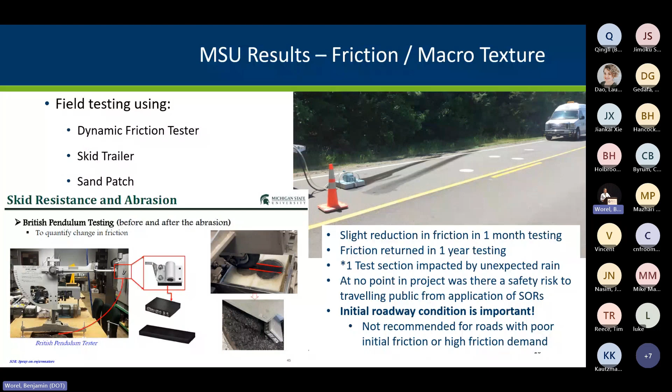If you're starting with a roadway that has marginal friction values, it's not a good candidate for these spray applied treatments. You need something that can absorb the slight reduction in friction and then bounce back the following year.

So now getting into further Michigan State testing on cores. Thanks to Emin Kutay and his team for these slides. They wanted to do an in situ test on cores taken from the study, but had trouble doing the modified BBR with some of the size specimens, so they ended up using a larger BBR beam and a similar 3-point bending testing setup. The results I'm sharing on the next couple slides are from their modified 3-point bending test.

So there's some of the fabrication stuff, cutting down the core samples from MnROAD and doing some aging on some of them. This is where it gets to the fun part, where the control is on the left, and then you have the different products on the right.

This is the 1 month or unaged cores, moving through to the 1 year, with that red line coming across and each of the different products changing from then. At 1 year, all the products and treatments show reduced stiffness in this modified bending beam test setup. Similar for the lab aged or 2 year condition, as well as the extreme aggressive aging condition, where we're still seeing a difference in some of the treatments.

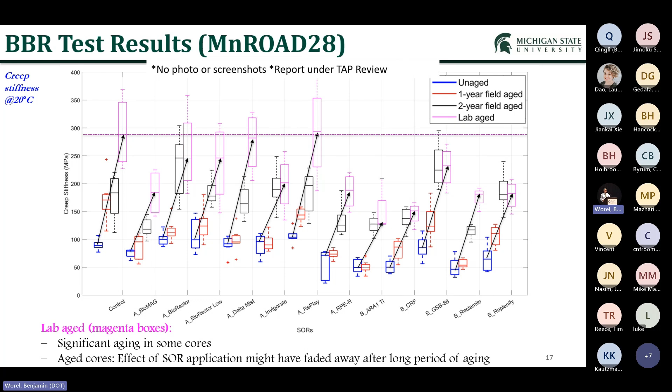So now getting to the chemistry portion that I promised, I relied on a lot of AI for help with my images coming up. Dr. Moraes at NCAT helped me—this is not Dr. Moraes, this is me asking Google Gemini to draw a chemist dressed as a construction worker fixing a road.

So you can blame me for the chemistry included in this study. I was naive enough when we first came into the study that I thought, hey, we have all of these chemistry tools—is there something we can test on the pavement that'll give us a quick answer, come back to in the future, test it again, and let me know this rejuvenator is doing something. I learned something I learned my freshman year in college: chemistry is complicated, chemistry is tough.

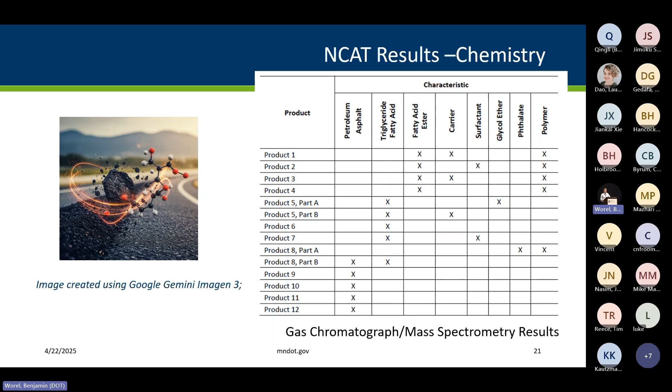And now it's kind of my takeaways from that. So bear with me—you guys have probably seen Chemistry for Dummies, this is Chemistry from a Dummy. Raquel did approve these, but this is kind of my crude takeaways of asphalt chemistry.

So we did SARA analysis, or fractionation of the asphalt into saturates or aromatics, resins, and asphaltenes. I always get confused with asphaltenes and maltenes—I have to remind myself that I like maltomeal cereal, so the maltomeal is good, that's the maltenes, those are good. And then the asphaltenes is where it gets bad—they're the heavy, long, black hydrocarbons.

So be glad that I'm not helping make lunch today, but I had some fun with Google Gemini, showing our maltenes being good, black marshmallows being the asphaltenes, and showing that as it ages, it's really the ratio—not necessarily the quantity, but how that ratio of the two changes from the unaged to the aged asphalt. So like I said, chemistry is complicated. Adding into that, you add your polymer modification.

So you have the spaghetti noodles into that as well. And that was one of the things that came out in the study with both the Michigan State efforts as well as the NCAT binder analysis. Different base binders accepted the different products differently.

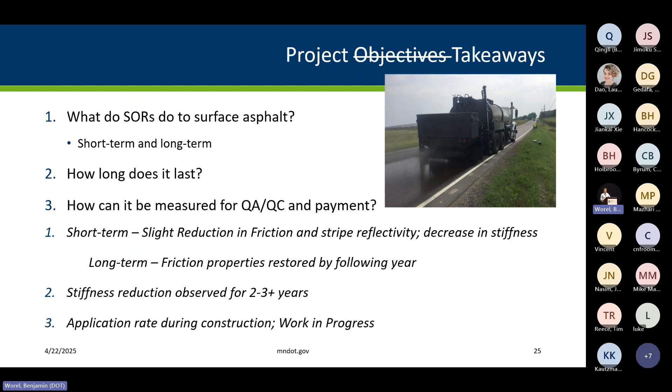Again, all products in the study showed benefits. Proper characterization of your initial roadway is important. And then manufacturers and suppliers are the experts on their products. It is in their best interest to use those appropriately, and they have a lot of knowledge and will put effort to get that accomplished. Selection depends on a lot more than what was included in the study, like cost, aesthetics, and ultimately environmental considerations like EPDs or the source material.

Additional testing and monitoring—like I said, we did a lot of testing, we being the MnROAD team. There was over 860 sand patch tests, over 430 different DFT tests. We did skid trailer testing, albedo. There's drone videos—I want to make sure everybody knows, from all the sections we've shown today, a lot of the images overhead were drone images. There's a YouTube link for those. Jacob Calvert works with MnDOT Aeronautics to capture those. And lastly, we have close to 2,000 cores taken from these sections. We're just looking at that top half inch of asphalt, so we're taking a full depth core, cutting away to that top half inch, and then doing the testing on that.

And then recently funded, we have a phase 3 of this study, a 36-month testing selected through NCAT as well. I found an old project picture—so back when Emil and Glenn and Jeff Brenner were on the team here at one of our field sections in St. Michael.

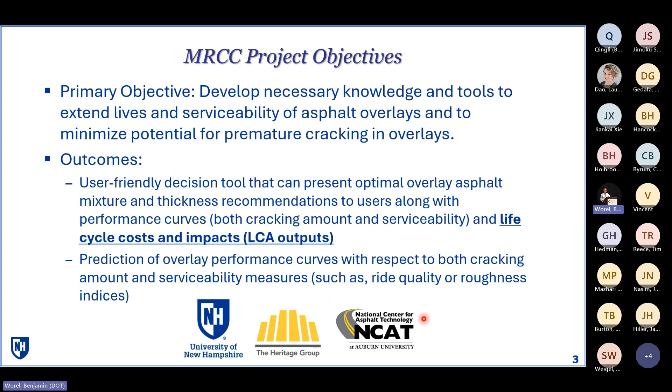So overview of the MRCC study: 10 sections. I'll talk more about the cross sections, but they are all on Interstate 94 on the main line, and all of them are constructed with flexible pavement underneath and then an overlay on top.

The construction was done by first constructing 5 inches of bituminous base, 58S minus 28 mixture, a standard MnDOT mix. Then saw cuts were made in half of the section - you can see down below, 400 foot section, 200 feet where the underlying layers are intact, and the other half has saw cuts. Those saw cuts are full depth in order to create the worst case type of scenario.

Leaving stuff intact also has its own purpose. As we saw in previous efforts done at MnROAD, thermal cracking and low temperature cracking are obviously a big challenge. So we have this half of the section dedicated to thermal cracking, and another half of the cells dedicated to reflective cracking.

After those 5 inches were constructed, saw cuts were made, and an inch of the top layer was milled off in order to create the layer you would typically have on asphalt-on-asphalt type overlay jobs. Granted, this old asphalt here is not aged as we would often have in many real highways. Then there's 2 inches of unique surfaces put down, across 10 different cells, each with a different type of mix.

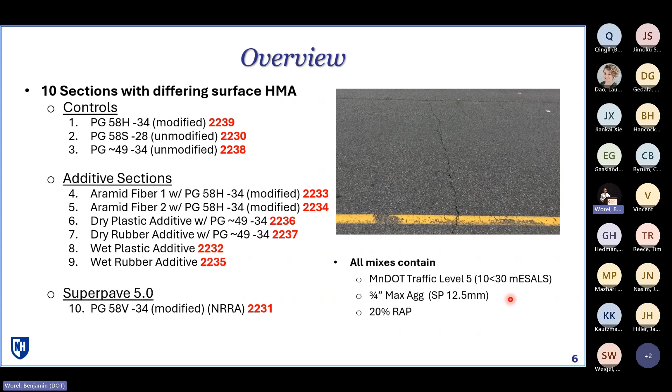This just gives you a little bit more information on the exact modifier or exact additive types. We'll come back to it as I go through the presentation, but just for completeness, I included that here.

B is a phase that still exists mostly in the research domain. In this project, we will use it, and you'll see why when we come to the end of the presentation, because that's where a lot of these distinctions, especially for these innovative modifiers, show the differences in terms of what your embodied carbon amounts could be when you consider the operational side as well.

So the scope of LCA work within the context of MRCC is to start with cradle to constructed, because that's the data we already have from construction, and there were certain life cycle inventories that had to be developed. Now in future, we'd like to extend it into the use phase as well. So this presentation will just focus on A1 through A3 and then A4, A5 stages.

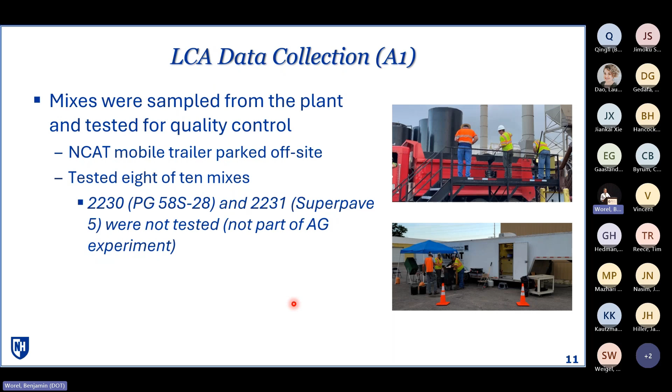So just to show small differences do have to be considered when you're looking at conducting LCA, including changes in binder contents or in-place densities, because that impacts how much mix gets moved, what thicknesses you end up with. All of that goes into your calculation, and so having those is important.

That's why I often get asked, especially by students, why it's taking so long for the construction industry to settle on product category rules. There's a lot that goes into it. It's not as simple as a standard automotive manufacturing process where every pickup truck is manufactured the same way, using the same amount of metal. So it's much easier to do in that case.

In our case, as you'll see, even between these 400 foot sections, there are differences in terms of how much fuel gets used, how much compactive effort goes into compacting them. And all of that translates into differences in what your final global warming potentials are.

The background data—a lot of these additive mixes use additives. And while now with things like NAPA's Emerald Eco-Label system we have existing PCRs or EPD processes for standard asphalt mixtures, it's still a work in progress when we look at these additives.

So this is showing which databases were used, specifically when we talk about the binder itself. The Asphalt Institute LCA study generated a lot of information, and for the 3% SBS modified binder, the 58H-34, and just the control binder, that's the database we utilized.

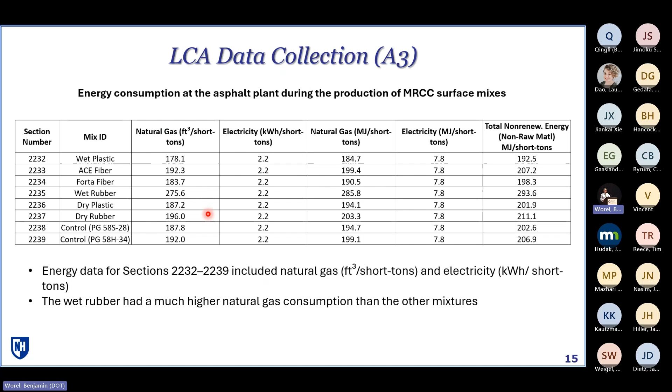So what we first see is anytime we look at unmodified binder compared to modified binder, you see a drop, and that makes sense. SBS as a polymer has a fairly high embodied carbon content that goes into creating it, and then also the blending process and everything else. So you do see a benefit when using unmodified binder in terms of CO2 generation just in the manufacturing process.

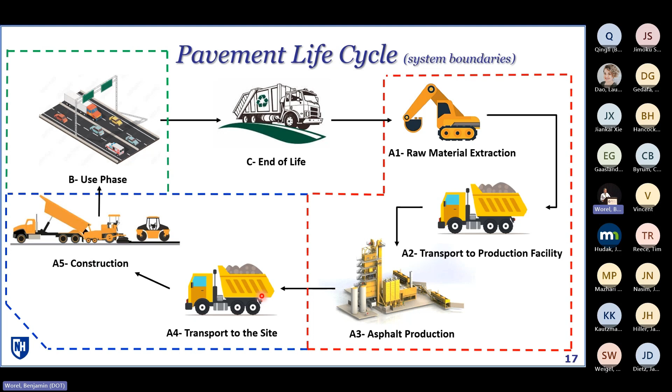So that's A1 to A3. Now let's look a little bit at A4 and A5 stages, which is really the transport to site and construction, mainly construction transport to site. All of these went the same amount of distance from the plant to actual construction. There is a small change though, having to do with the inherent GMM difference, or the density of the mix itself, because that controls how much mix you are actually moving to the site for a given thickness. So once again, foreground data collection, all Caterpillar equipment.

We had Suri on site noting down the actual serial numbers for the equipment, as well as the operation time and dwell time or idle time of this construction equipment, which allows us to translate that into what type of fuel usages they had. That translates into what type of emissions were generated. So again, a lot of data collection effort went into this.

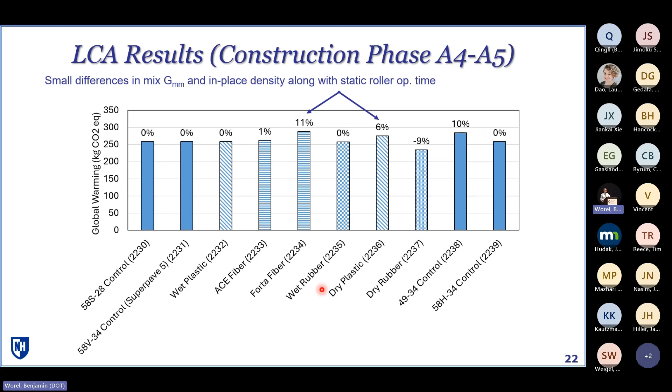So just to summarize, A1 through A3, big things that we learned: modified base binders had quite comparable environmental impact to those that were unmodified here, as in with use of plastics or rubbers or fibers, compared to the polymer modified control.

Mixes that had the unmodified base binders, especially the two wet ones, usually showed about 9 to 12% lower impact, mainly because the base binder itself was unmodified and didn't have that 3% SBS. Overall, if you look at it in the grand scheme of things, there's little to no impact in terms of the differences between those 8 unique mixes.

And that's good. That at least takes some of the fear out, that if we are doing some kind of a new process, we might all of a sudden be increasing what kind of global warming potential we may have.

And then from the construction side, when you compare to A1 through A3 stages, that's where most of your impacts are. A4, A5 are very small numbers compared to the overall production itself. And where the differences were, they're mostly coming from in-place density effects as well as the compactive effort effects.

So those are the two things that seem to be impacting most. Coming back to what I said earlier, I think the biggest thing we learned by going through this is that the differences in terms of overall LCA is in performance, not necessarily these differences in how these mixes are put together and manufactured. And that's the next step that we are looking forward to.